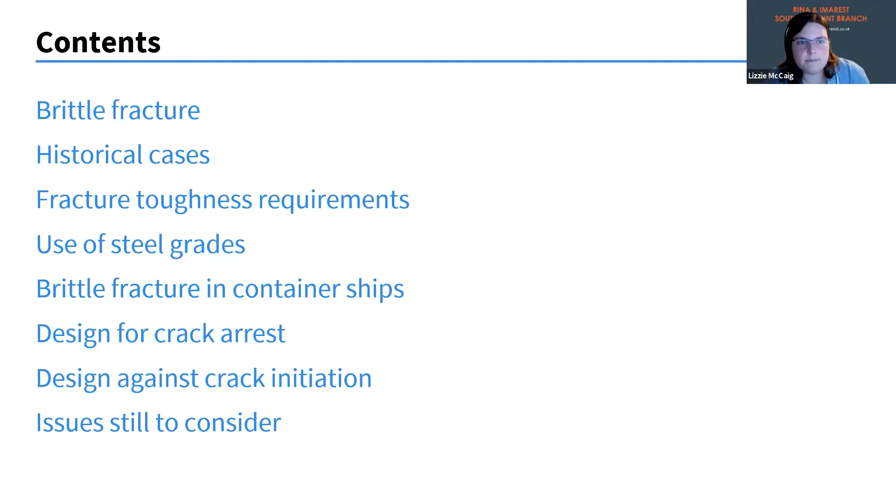So what is brittle fracture? Quite simply, it's the sudden, very rapid cracking of a material under stress, where you see very little plastic deformation. In a ductile example, the material is a bit like chewing gum - you pull it and it stretches and then eventually fails. With brittle fracture, it just snaps, a bit more like a hard caramel type thing.

The cracks themselves are usually initiated at a stress concentration, such as a pre-existing material defect, or a defect which might develop in service, such as from fatigue. The cracks will continue to grow and increase in magnitude once initiated, running perpendicular to the applied stress. In ductile failure, the material starts to deform plastically once yield is reached, and continues to deform until you hit the UTS. But in brittle fracture, there's no ductile behavior before failure - the fracture is very clean and sharp, and you don't have much warning that it's going to happen.

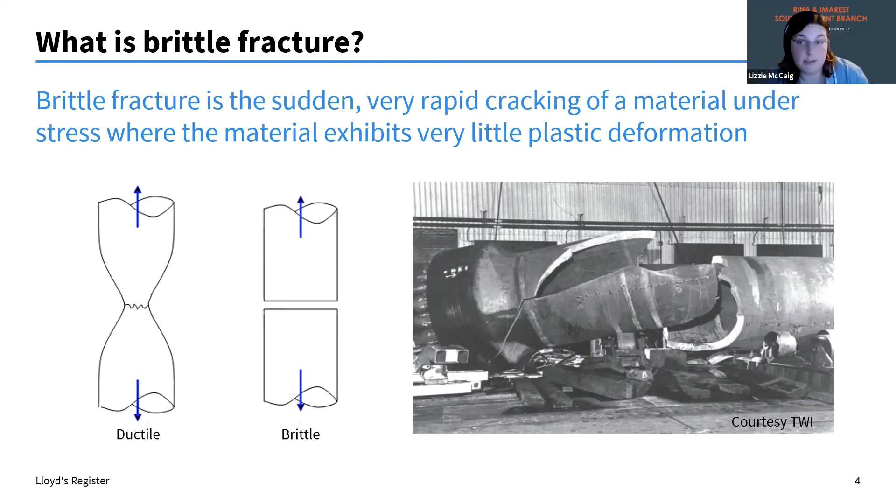Factors leading to brittle fracture can include high yield strength steels, low temperatures which can cause a ductile to brittle transition, overloading with high loading rates and high stresses, stress raisers resulting from flaws or cracks, and low fracture toughness in the material itself. Even coarse crystal grains in the structure can increase the possibility of brittle fracture occurring. As I said, brittle fracture failure is instantaneous, and it can have some catastrophic consequences.

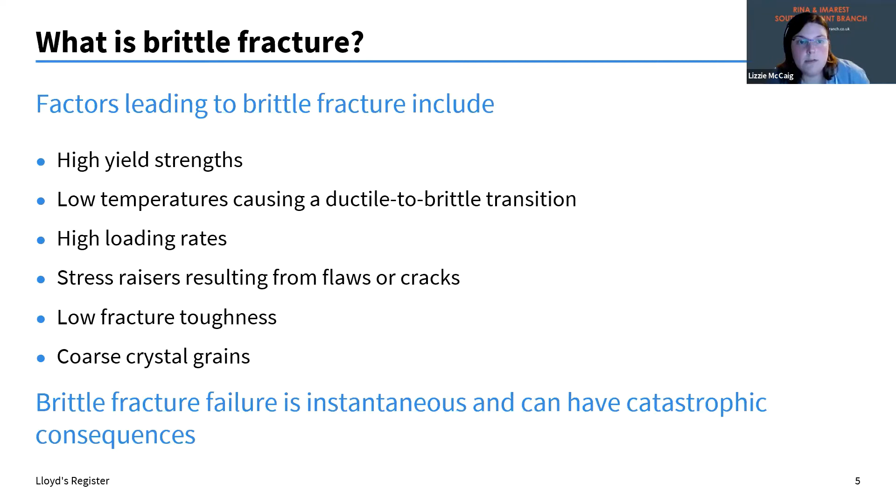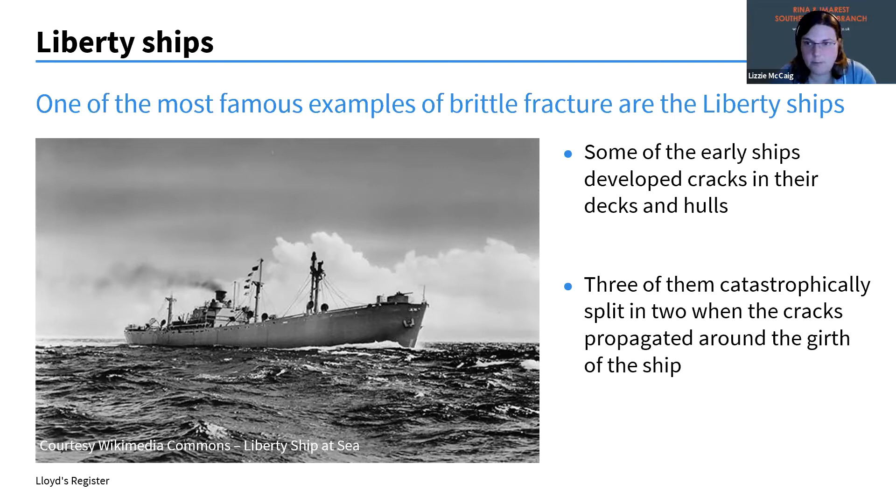So, historical cases. I think we've all heard of the Liberty ships - one of the most famous examples of brittle fracture. These ships were thrown together in World War II over in America, in a great hurry. They are also some of the first ships to be welded, which becomes quite important later. Some of the early ones developed cracks in the decks and hulls. Three of them catastrophically split in two, where the crack went all the way around the girth of the ship.

This is the Schenectady, and she broke in two whilst moored alongside for outfitting. That was quite an extreme example, and you can just see it's snapped in two.

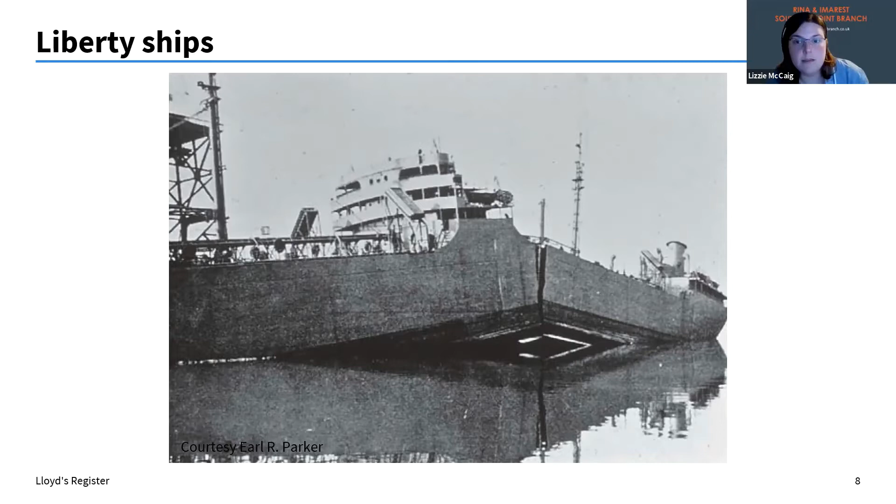So they needed to try and figure out what happened. The Ministry of War Transport, which was the department in Britain in charge of ships at the time, did some testing on an actual ship. It was a woman called Constance Tipper at Cambridge University who was running this whole thing.

Things they found were that because the ships were sailing in the North Atlantic in winter, they were exposed to temperatures that could fall below the critical point where the steel changed from being ductile to becoming brittle. That allowed cracks to start easily. Because they were using welded construction, that allowed the cracks to propagate from plate to plate, whereas in a riveted plate, you get to the edge of the plate and there's nowhere for the crack to go.

They get arrested when they hit that edge of the plate. Also, because of the quite poor design of the hatch corners, they had square hatch corners, and they also had weld seams located close to the hatch corners. That meant you had stress concentrations at that hatch corner that then went into the weld, and then it went all the way down the weld, and all the way around the ship.

Combine that with the fact that because it was a war, the ships were often overloaded, and again they were sailing in winter, so they were subjected to storms. All these things combined together didn't make for very good design against brittle fracture. Some of the things they did to address this were changing the hatch design and reinforcing the ships, which did reduce the number of fractures observed.

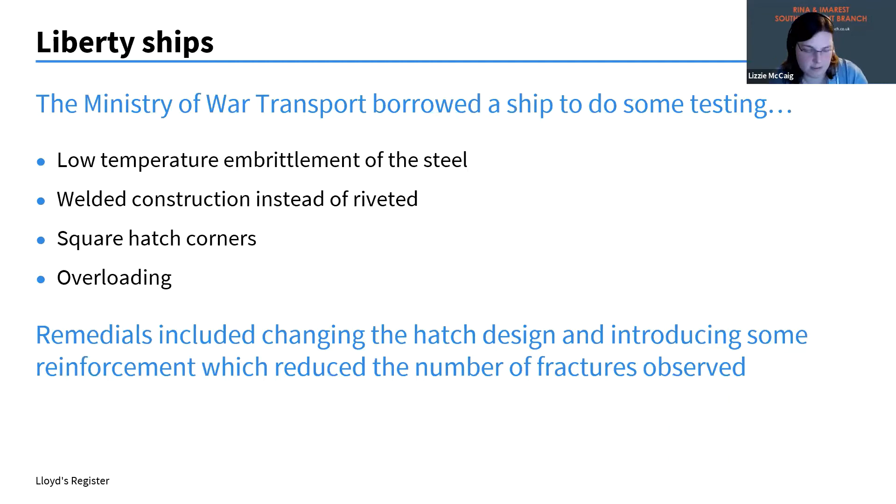So moving on, this ship is the MV Kurdistan, built by Swan Hunter in 1973. She was built to an ice class, at the time called Ice Class 1, which I think was not the highest level ice class at the time by that class society. She was longitudinally framed, but the sides were transversely framed, had 6 cargo tanks, and was built almost entirely of grade A steel.

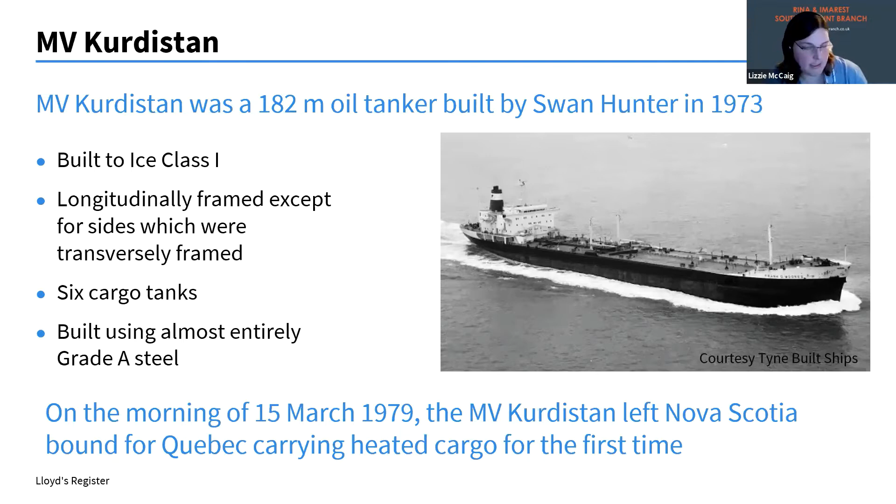For the ship, the weather conditions were quite poor. The ship was rolling quite heavily, and she was traveling through ice, which may have caused some damage. As she cleared the ice field, the crew heard a bit of a thud, a bit of a shock, and oil started to leak from a vertical crack in the sides of the number 3 wing tanks.

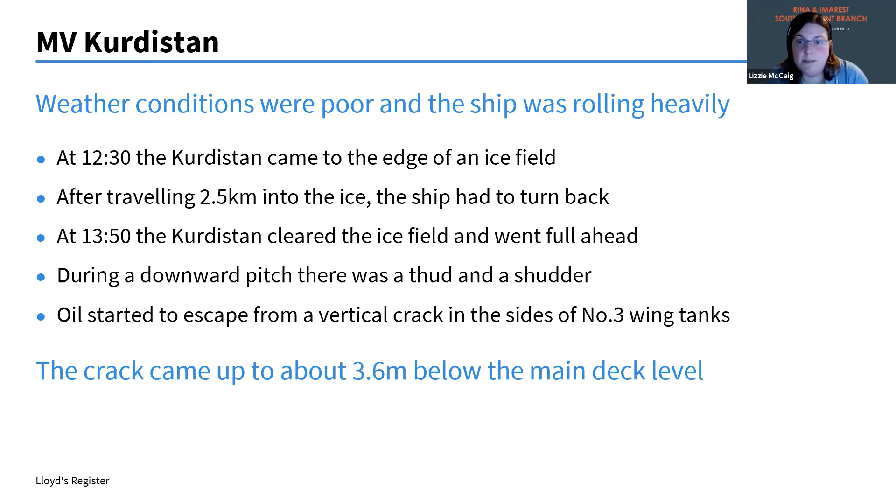These cracks came up to about 3.6 meters below the main deck level, so they're quite big cracks. The crew took remedial actions and the ship continued on. They transferred oil from number 3 wing tanks to number 4 tanks, but then they felt a second shudder and halted that oil transfer. The weather conditions had improved by this point, but by 9:30 the ship had broken in 2.

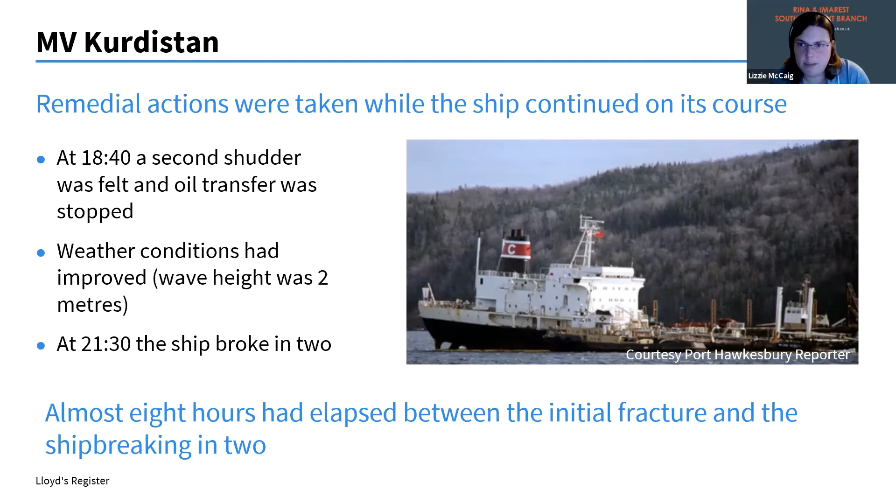Basically, between the first fracture and the ship breaking in two, it was about 8 hours. So it was quite quick.

Transport Canada investigated this and found that it was due to a brittle fracture. There was a defective butt weld in the port bilge keel. The bulb plate was misaligned, the crack arrest hole was missing, and thermal stress calculations indicated there was a tensile stress in the shell and the bilge keel resulting from the carriage of the warm cargo in a cold sea. That combined with impact stresses on the bow meant you had an overload of the bilge keel and it fractured.

So this is like the combination of poor weld metal toughness and high stresses in the presence of a defect. They didn't quite establish the sequence of the failure, but they did identify that it was due to this low temperature, high temperature transition, and the weld defects.

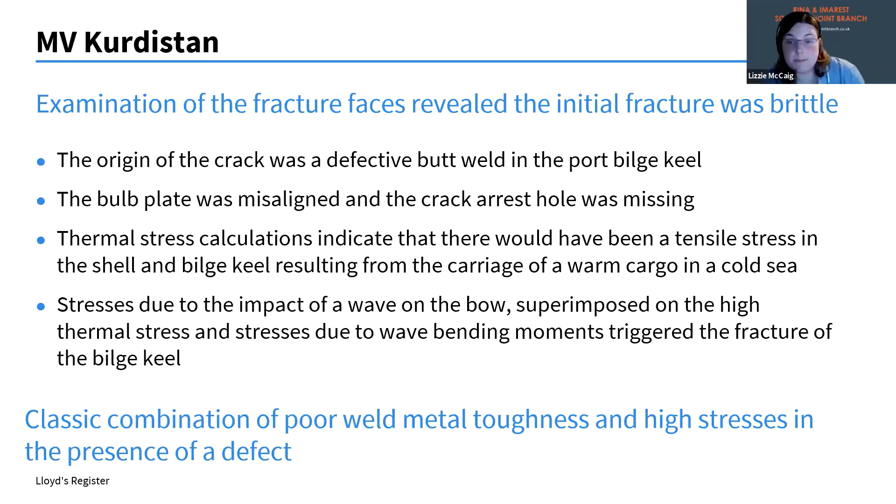So the next one, this is also quite a famous one. This is MV Lake Carling. She was a handy-sized bulk carrier built in 1992. Again, this is in North America, crossing the Gulf of St. Lawrence. She was ice class, strengthened for heavy cargoes.

She had grade A side shell, but the shear strake and strength deck were grade E. All the steel grades did comply with the class rules at the time, so from that perspective, she complied with the rules.

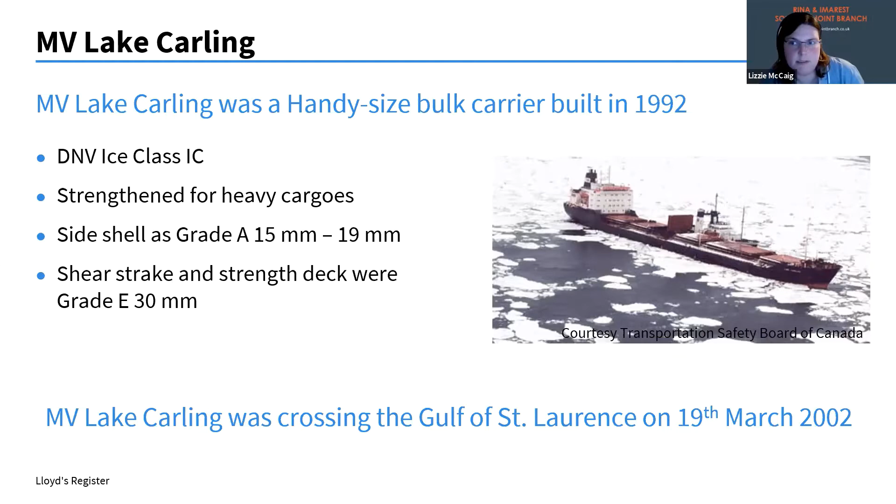There was a minor crack in the hull and it turned into a 6-meter hull fracture. The crack initiated at the base of the web frame at frame 91. On the port side, they found similar cracks at other locations, and calculations showed that the original crack was as short as 10 centimeters.

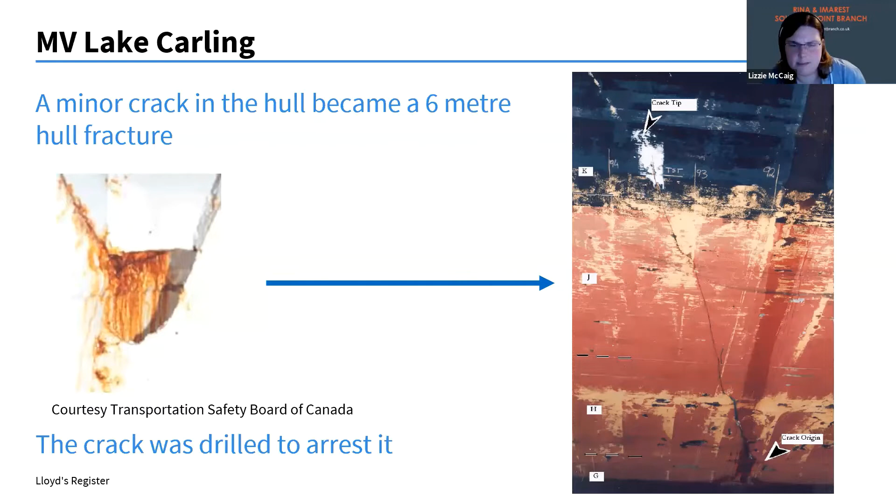So the question was why did it then lead to this massive 6-meter long hull fracture that they had to arrest by drilling a hole through it?

So they looked at it. The vessel was properly loaded, the seas were calm, temperature only -6 degrees - it wasn't that cold. But when they looked at the material itself, they found that the fracture toughness and grain size of the steel were below what you'd expect - there wasn't an official industry standard at the time, but it was below the average values you'd see for grade A steel at that time.

And this is a quote from the accident report. It said the steel performed below expectations and did not provide a reasonable damage tolerance in all its operational conditions. So this is a case where the material itself was just poor quality, and that led to the brittle fracture.

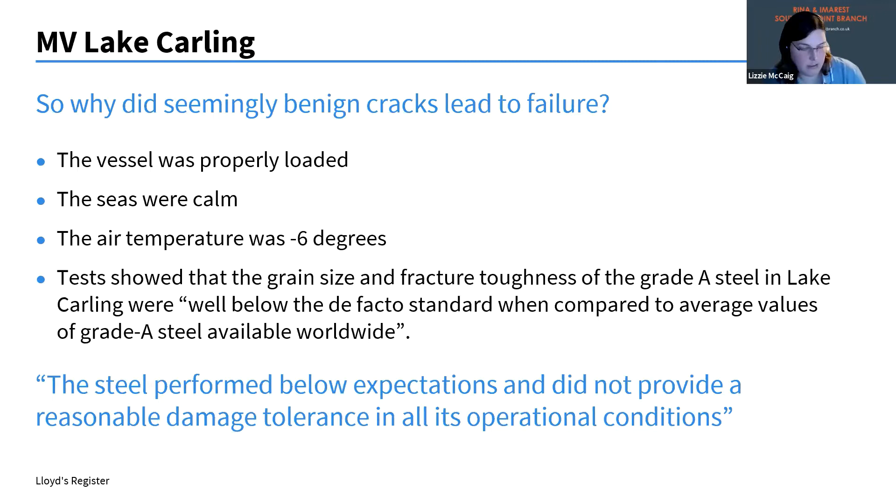So the next case, this is a bulk carrier built in 1972. The hull was grade A, the deck and shear strake grade D. She was strengthened for heavy cargoes. She was going through severe weather conditions and broke in two.

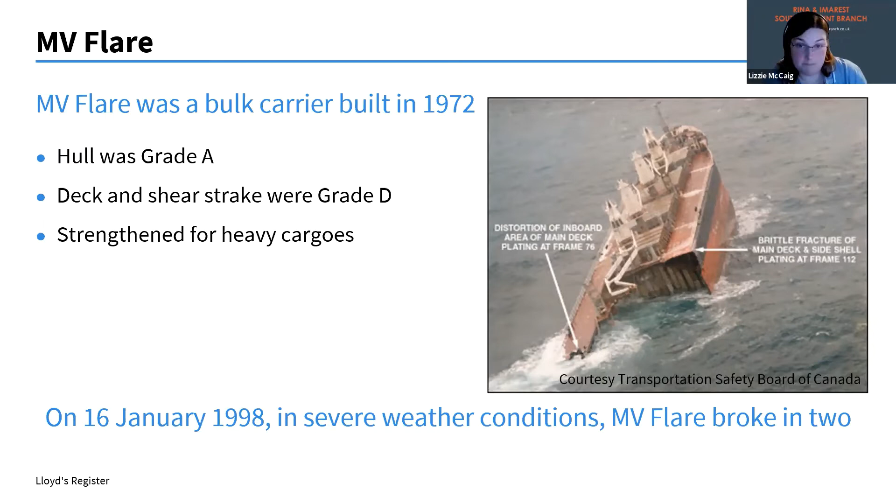This is a lovely picture extracted from the accident investigation report, where you can definitely see it broken in two. So what happened here was that the deck transverse at frame 76, inside the number 5 port upper wing ballast tank, had been damaged. The face flat boundary stiffening was detached, extensively buckled. They found the deck longitudinals completely detached from the underside of the main deck plating.

Crucially, the fractures at the end of these longitudinals showed no plastic deformation and were at 90 degrees to the normal deck plating surface. I think you can just about see the buckling, and you can just about see the brittle fracture, but there's more pictures to come.

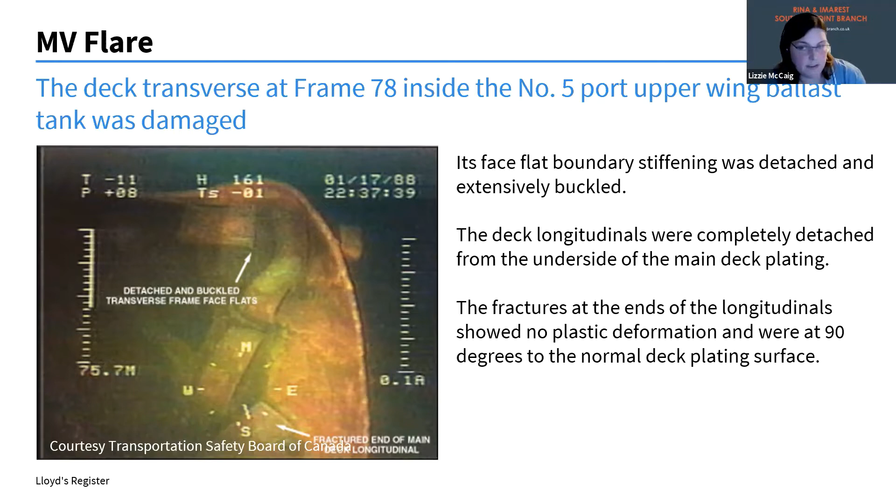A close-up examination showed that there were several small clamshell-shaped fissures, which is a typical characteristic of fatigue fissure damage. They were also corroded, which indicated these had been there for quite some time before the accident happened. The initiation and rapid propagation of the brittle fracture across the main deck at this location is consistent with the existence of such discontinuities.

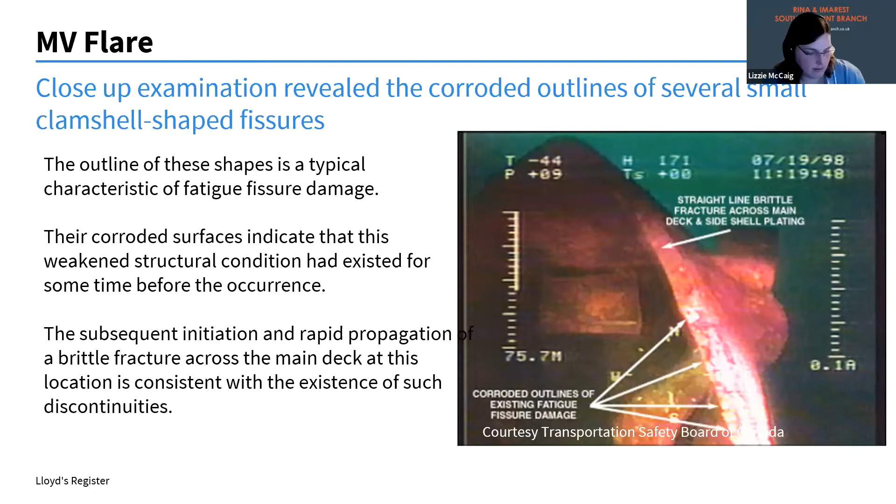Then you can see here more of these clamshell shaped markings, and the Transportation Safety Board of Canada found that their location in the principal line of structural failure indicated that they'd contributed to the concentration of localized stress levels in excess of those which the bottom shell plating could physically withstand. That said, she'd been sailing around for quite some time with these fissures, so why did she fail?

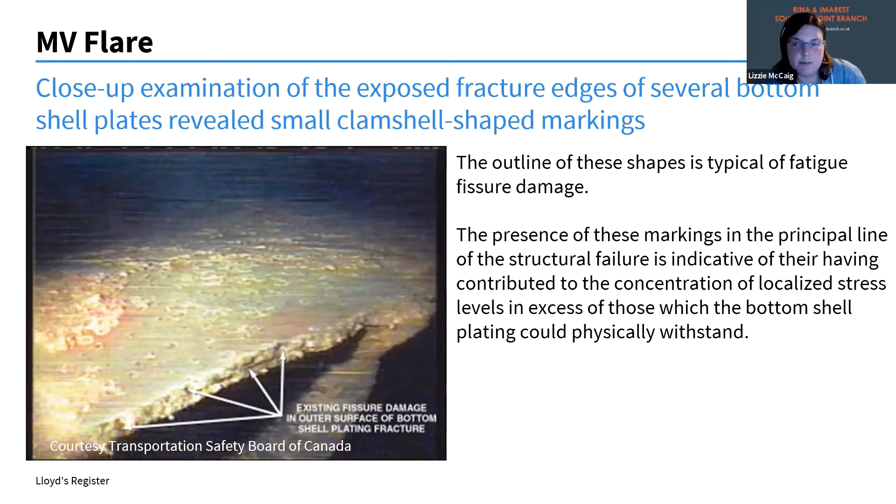Why did the ship break into two on this particular day? The vessel routinely sailed with a light draft forward. The minimum draft forward for the vessel was supposed to be 4.6 meters. The actual draft forward was 3.07 meters when the ship left Rotterdam. She was crossing the North Atlantic in winter, but the number 4 ballast hold wasn't filled with ballast as it should have been. This would have left the vessel vulnerable to pounding and slamming.

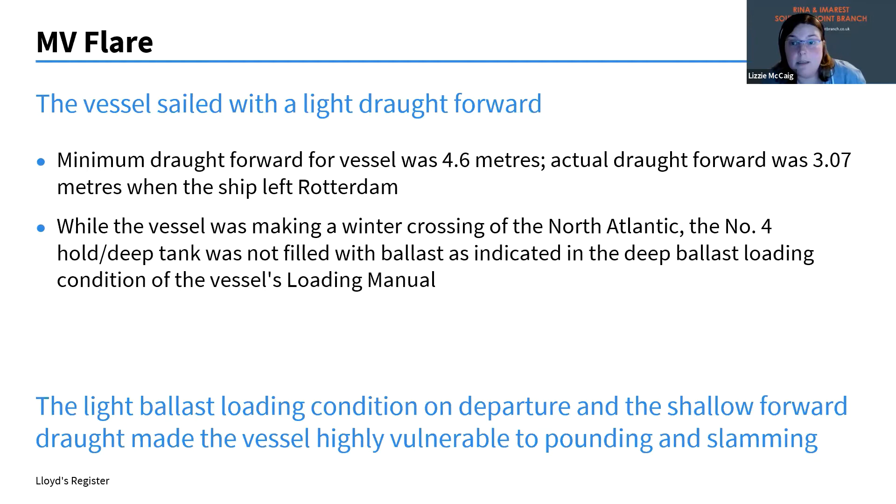One of the typical solutions if a vessel is slamming is to increase the draft forward through the use of ballast. In addition, the ballast tanks themselves had been damaged previously. There had been quite a lot of structural repairs required to the ship that weren't carried out before she left Rotterdam. Fractures in the boundaries of the upper wing ballast tanks had been discovered, and they were being repaired during the voyage, but the repairs hadn't been completed by the time of the accident.

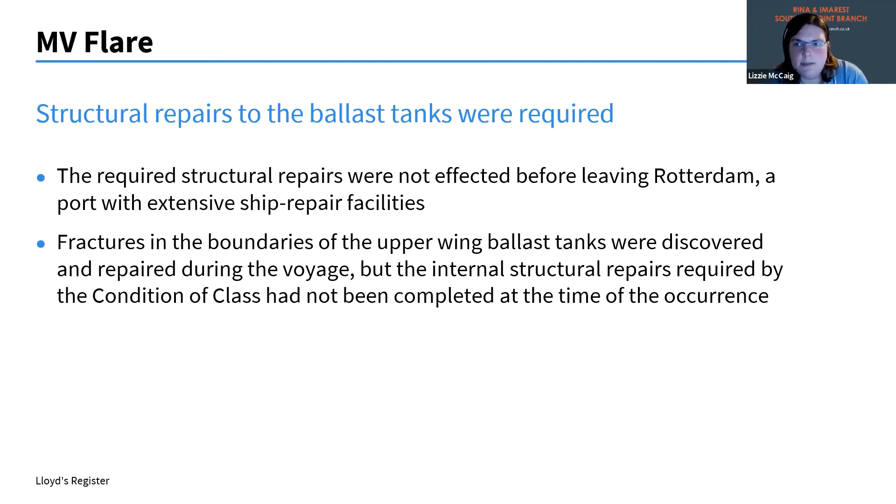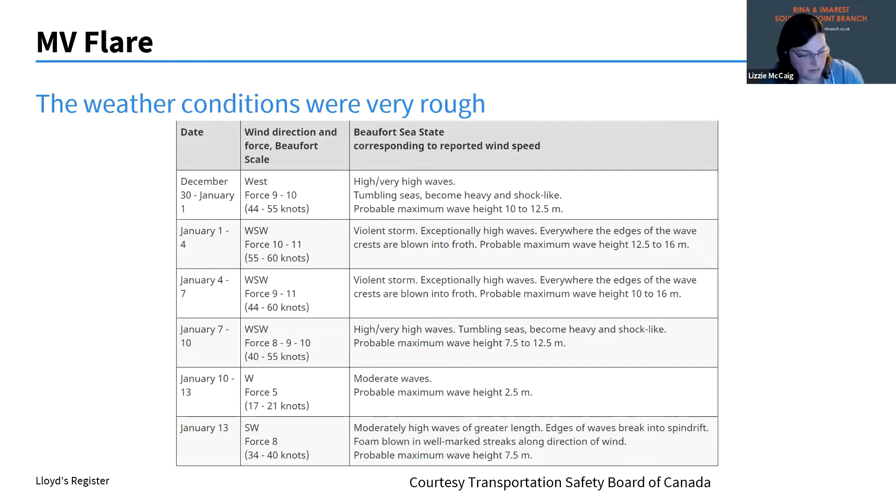You then combine that with the fact that the weather conditions were quite rough. They had very high waves and a violent storm, exceptionally high waves, and another day, January 4th, 1998, another violent storm with more high waves. This day was okay, moderate waves, but you can see the weather conditions were pretty rough. So at midnight on the 16th of January, the ship encountered large and steep irregular waves, which reportedly caused slamming at the forward end, and there was a loud bang and severe hull whipping and vibration.

And then at 4:30, there was loss of longitudinal structural integrity initiated by the rapid brittle fractures that had appeared in way of the existing damage near midships. There was then bottom structural failure, which resulted from suddenly imposed compressive loading and localized stress concentrations, which then caused the hull to break in two.

So this was a case of the ship not being properly operated in the first place, and they were playing a bit fast and loose with their repairs as well. That led to a case of overload essentially on the ship, combined with some structural damage that already existed. So you can see from all those various historical cases the different means by which you could end up with a brittle fracture in a ship, be it from stress raisers, from defects, from overload, from low air temperatures, poor quality of material. All of these different aspects need to be thought about in order to reduce the risk of brittle fracture.

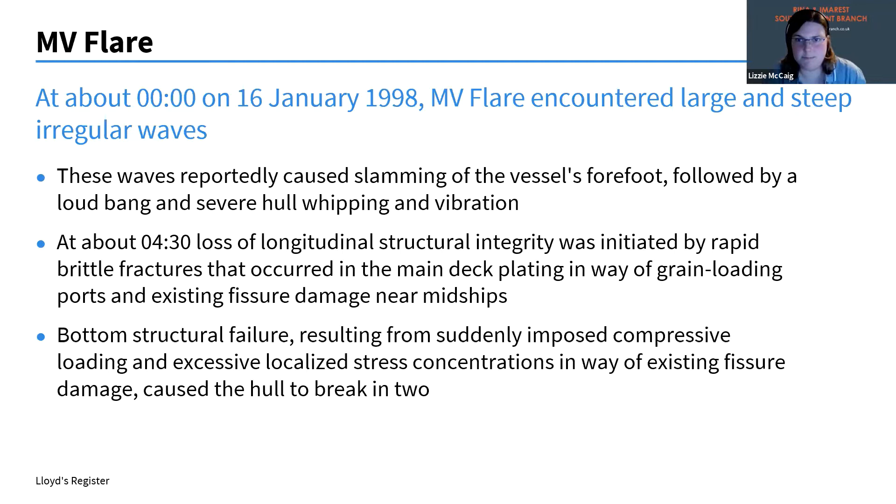So if we move on to fracture toughness requirements, this is about the material itself. We'll talk about improving the quality of the material first.

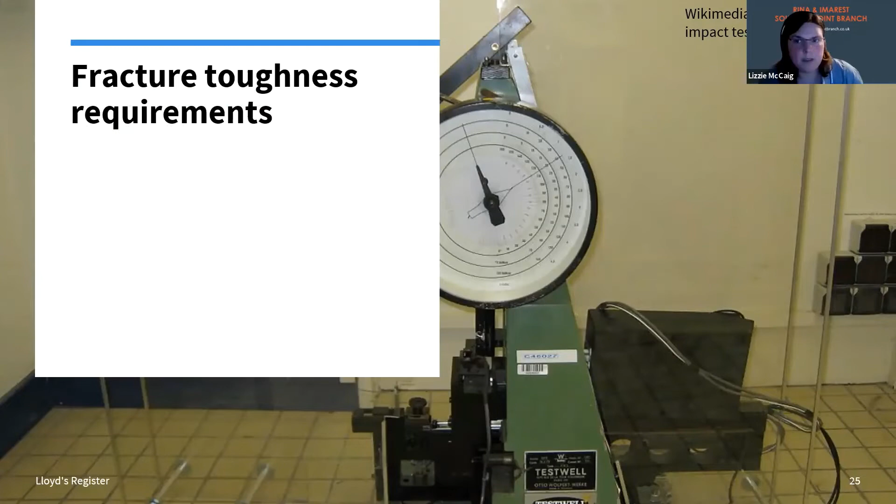Obviously we're talking here about the Charpy V-notch impact test. This was established in the 1950s, and in 1954 DNV were the first class society to introduce the Charpy test. By 1959 IACS, covering all the main class societies, introduced Charpy test requirements, but this was only for grades D and E. And by the 1970s the standards had risen, but we were still getting brittle fractures, as evidenced by MV Lake Carling.

By the 2000s, there was a minimum standard for grade B, but there still wasn't one for grade A. Actually LR had a standard for grade A, but the standard wouldn't have been sufficient to prevent MV Lake Carling. That's quite important to note. The main problem though is that it's quite difficult to get accurate and reliable correlations between Charpy energy and fracture toughness. So that's something else to bear in mind there.

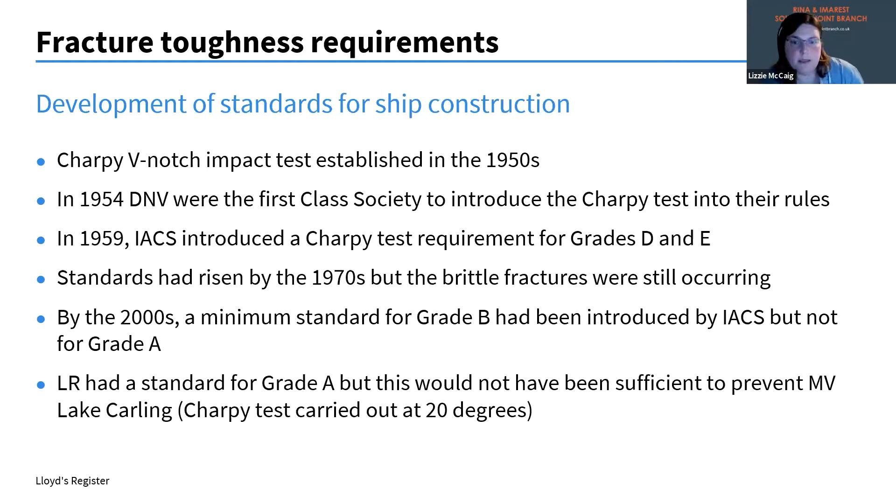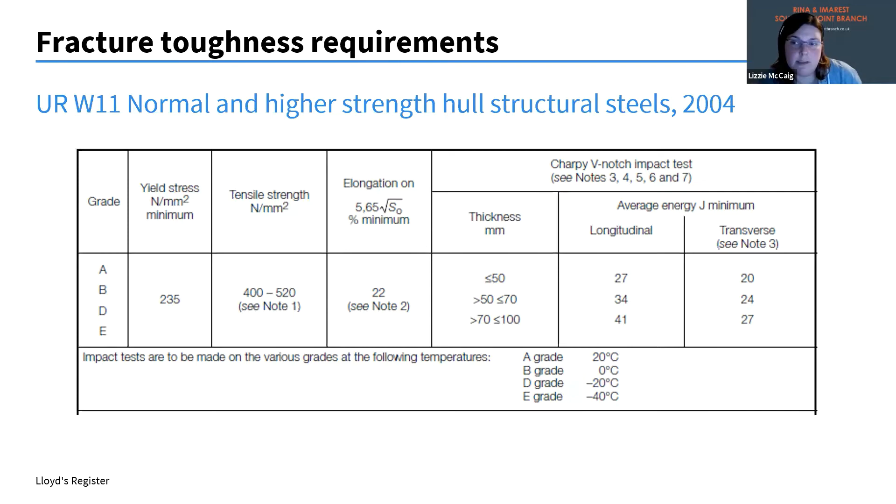But it's not enough to just specify what the material properties should be. We also have to look at how the steel grades are intended to be used. So IACS has another unified requirement, UR S6, which was introduced in 1979. What they do is divide different structures up into stress classes of 1, 2, and 3, based on the criticality of the structure.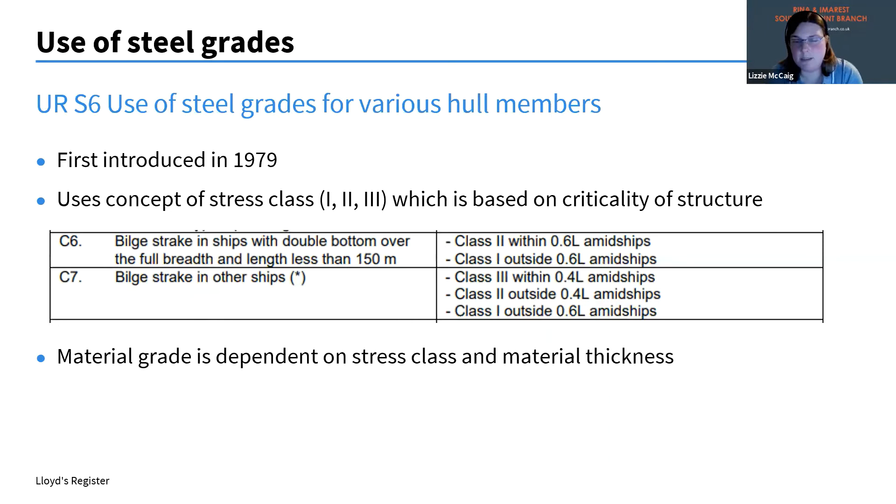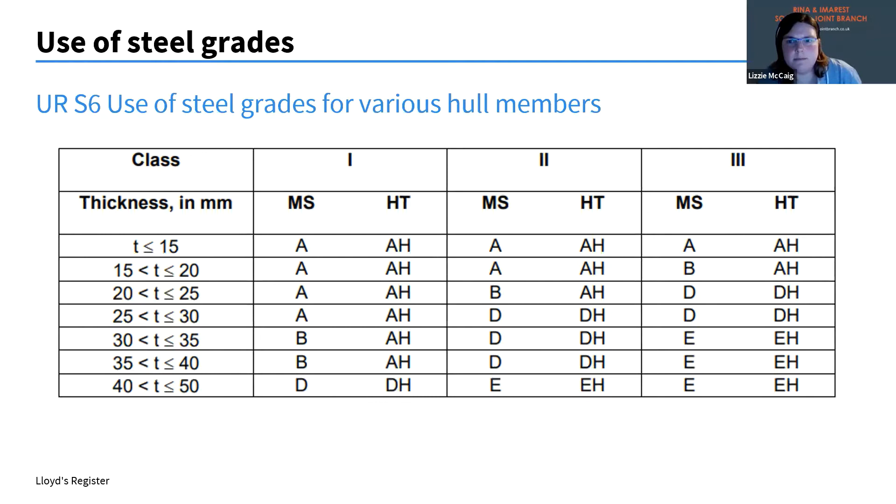And this material grade that you use in a particular location is dependent on the stress class and the material thickness. So you end up with this: looking here, for example, if you've just got non-critical structure that's less than 15 mil thick, then using grade A is perfectly acceptable. However, if you've got really critical structure and it's 50 mil thick, we're moving to grade E and grade EH. So these materials are getting tougher as they are more critical and thicker. We also have in UR S6 requirements for low air temperatures.

One of the leading causes of brittle fracture is if the steel's exposed to very low air temperature. IACS introduced this basic table after MV Lake Carling. It was imposed on them by Transport Canada that they had to sort this out. Here you can see that the lower the air temperature gets and the thicker the steel gets, the tougher the material needs to be, the higher the grade. You go from grade E here, and you actually can't even have minus 55 degrees C with 35 mil thick plate. You're just not allowed to do it. You have to go to grade FH. You can't even have just standard steels. So that's basically how all the IACS class members are controlling the use of steel grades.

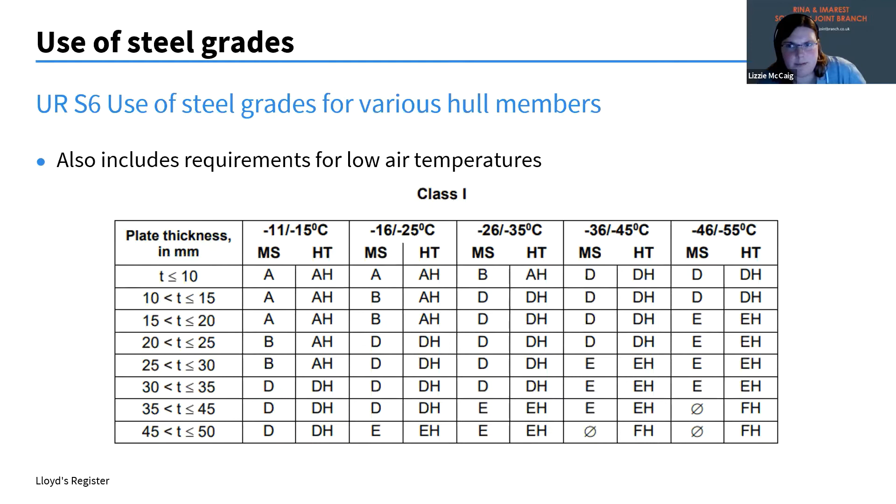However, this doesn't cover all eventualities. We then have to look at more non-standard uses. So that leads us on to brittle fracture in container ships.

As you can see from this, this shows the increase in size of container ships over the years. I think I created this in 2018, which is why it only goes up to 2018, but you can see there's been a rapid increase in the size of container ships.

What this has meant is that the required plate thickness for the upper hull girder has increased dramatically because the stresses have increased a lot. And in order to reduce that plate thickness, the use of high tensile steels has increased.

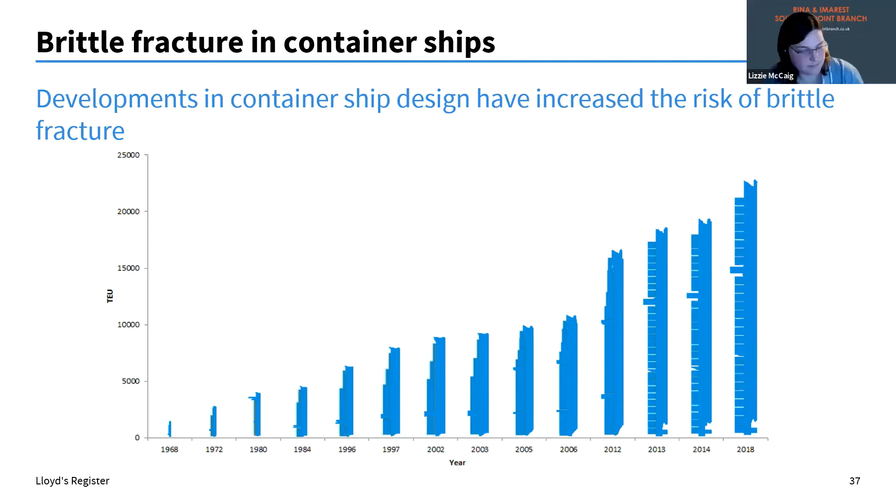You can see here this plot showing hatch coaming side plate thickness, and these are the different steels. As we get bigger and bigger ships, down here we've just got YP32, so that's high tensile steel, but it's not that high tensile. We move on to YP36, but then by the time we get up to 20,000 TEU, they're using YP47, which has a yield stress of 460 newtons per millimetre squared. So the trend has been, as the ships got bigger, to use higher and higher tensile steels.

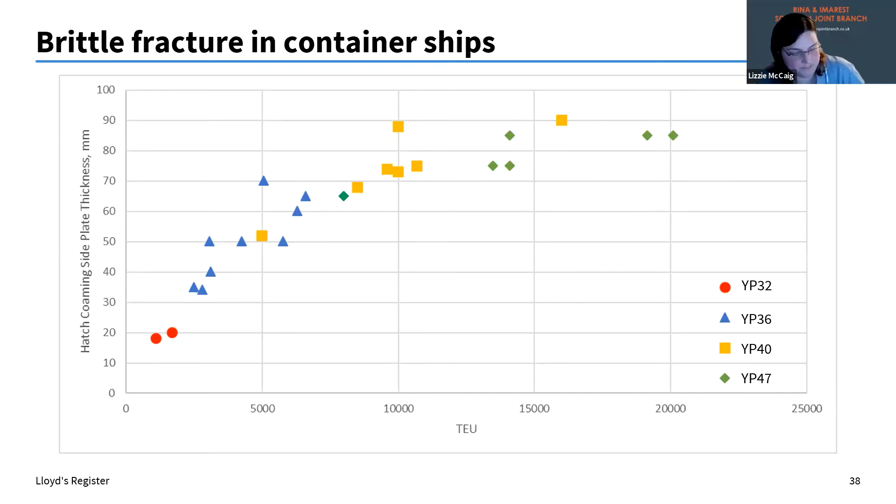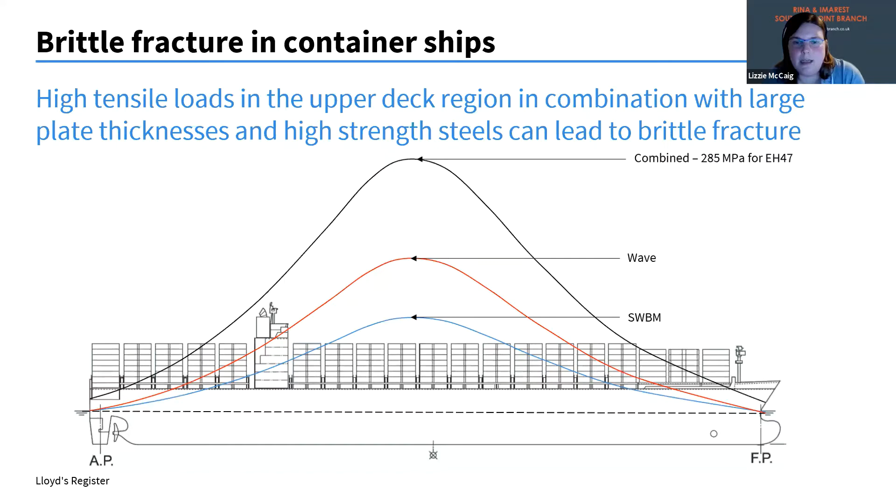The problem, though, is that these container ships also have very high tensile loads in the upper deck region. So you're combining very, very high loads with very high strength steels. As a result, this can lead to brittle fracture.

This is just showing that because container ships are normally hogging, that means the weld seams of the upper hull girder are normally being pulled apart rather than compressed. For those of you familiar with fracture mechanics, when you compress a crack, you slow the rate of growth, whereas if you start pulling it apart, you increase the rate of growth. So this is another reason why this is a particular problem for container ships.

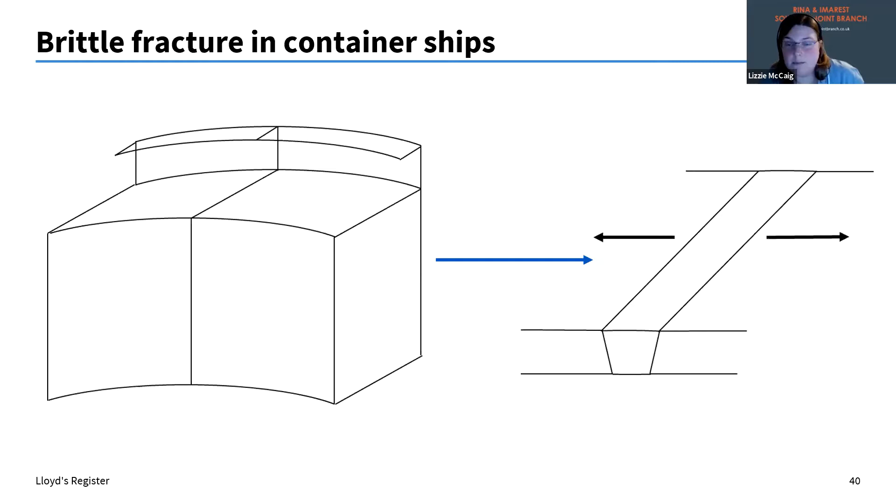The other problem is that as a material gets thicker, it is more likely to experience brittle fracture than ductile fracture. Also, as the strength of the steel increases, you're more likely to see brittle fracture versus ductile fracture. So if you have both an increase in the yield strength of the steel and an increase in the thickness of the steel, you're increasing even more the possibility that you could experience brittle fracture.

That, combined with the presence of welding imperfections which could lead to fatigue damage because you've also got high cyclic loads, does mean this is a particular issue for container ships.

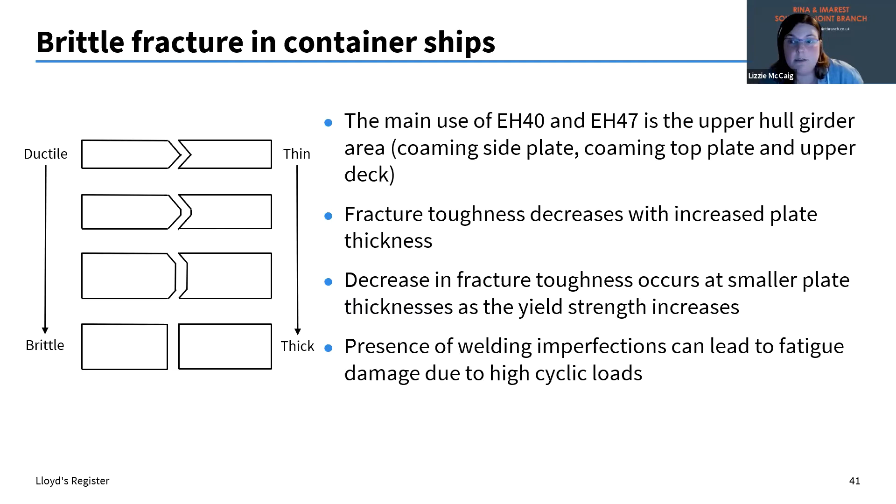So when we think about container ships, IACS have introduced a unified requirement, UR S33, that looks at this problem. In that UR, we consider two cases: one where you might have a brittle crack running along the butt joint of the block or subblocks, and another where a brittle crack initiates in that joint but deviates away from the weld into the plate, or where, with other weld attachments like longitudinal stiffeners, a brittle crack could initiate from one of those welds and propagate into the plate.

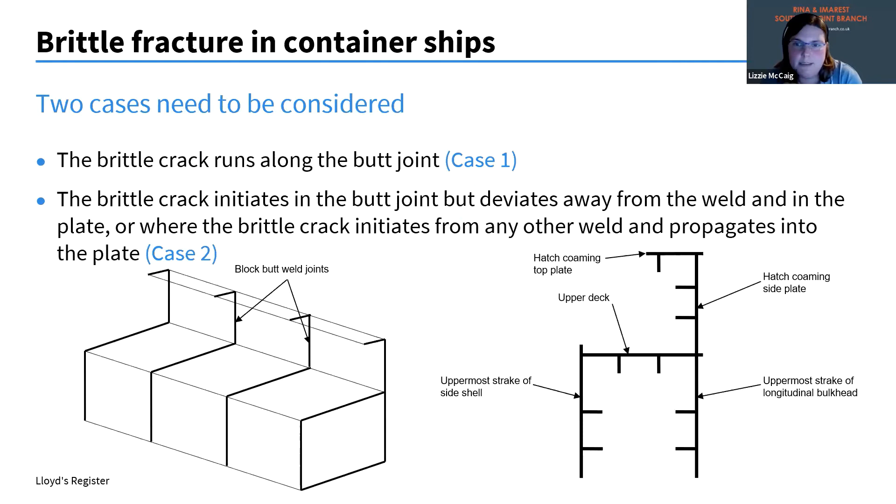IACS basically suggests measures you can use to try and reduce the risk of brittle fracture. The first approach you can take is to design for crack arrest. So you assume that a crack will initiate and propagate, but something about the design of your ship is going to prevent that crack from leading to the loss of the ship. Its propagation, its growth, will be halted by something — and that something could be various different mechanical measures.

So you can do something called block shift, where instead of having the weld for your hatch coaming in line with the weld of your upper deck, which is then in line with your side shell, you can offset these. So if you have a weld that's initiated in your hatch coaming butt weld, it will then get halted by the plate instead of going into the weld seam of the upper deck.

You can also drill crack arrest holes, and again these will halt a crack in the weld. You could also use crack arrest insert plates, which will do the same thing. Then where you've got the crack going into the parent material itself, that's where you use crack arrest steel. You don't want your crack initiating in your weld and then deviating into the plate and going all the way through, causing brittle fracture. So you use crack arrest steel.

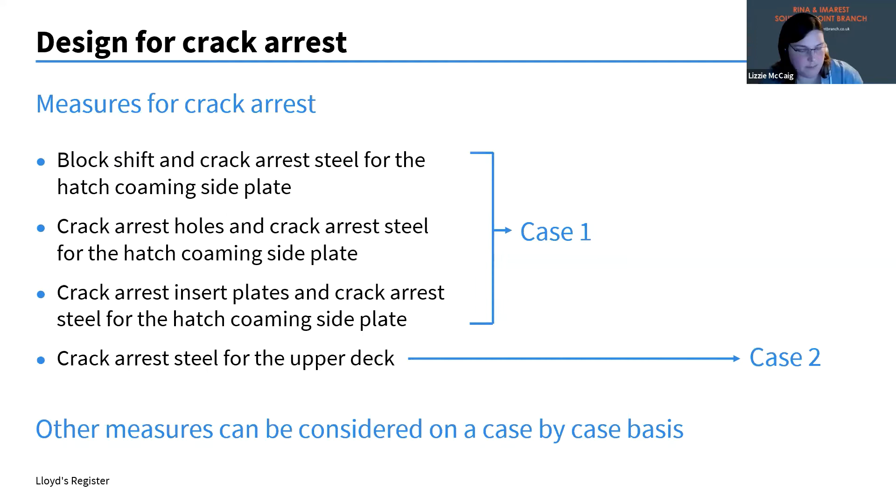These measures have been extensively tested, mostly in Japan, and that's why IACS has included them as example measures in their unified requirement. Although it's important to note these are only possible measures—you can do other things, but it's more complicated to demonstrate they work.

Now with crack arrest steel, the way it generally works is you arrest the propagation of cracks using the plate itself, using the boundary of the crystal grain to act as a barrier to crack development. If you remember, I said before that one of the problems for the Liberty ships was they had quite coarse crystal grains in their plate. If you have coarse crystal grains, it means fewer crystal grains in the plate, which means fewer boundaries that could slow the crack down and halt it.

Whereas if you have fine crystal grains, you've got a lot more boundaries, and the path the crack takes has to go through there, and there, and there, and this can arrest the crack. You can also use the orientation of the grains to force the cracks to zigzag instead of developing linearly, which again can slow the crack down and ultimately halt it.

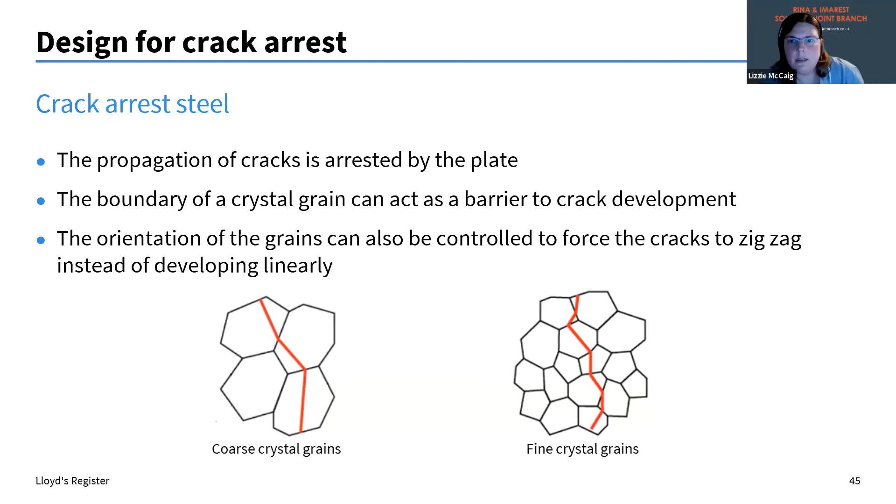Now the crack arrest steel's measure of arrestability is the KCA, or the arrest toughness. IACS have requirements about the toughness of the steel, with two levels: BCA1 steel, where the KCA value is 6,000, and BCA2, where the value is 8,000—8,000 being tougher than 6,000. In UR S33, IACS requires that for the hatch coaming side plate, if it's EH47, you've got to use BCA2. This is an even tougher requirement than you would have for, say, the upper deck, which would be EH40.

Now the issue with crack arrest steel is it's quite expensive. The reason is you have to do a lot of testing using full-scale model tests to confirm the crack arrest properties, and that just loads cost onto the material.

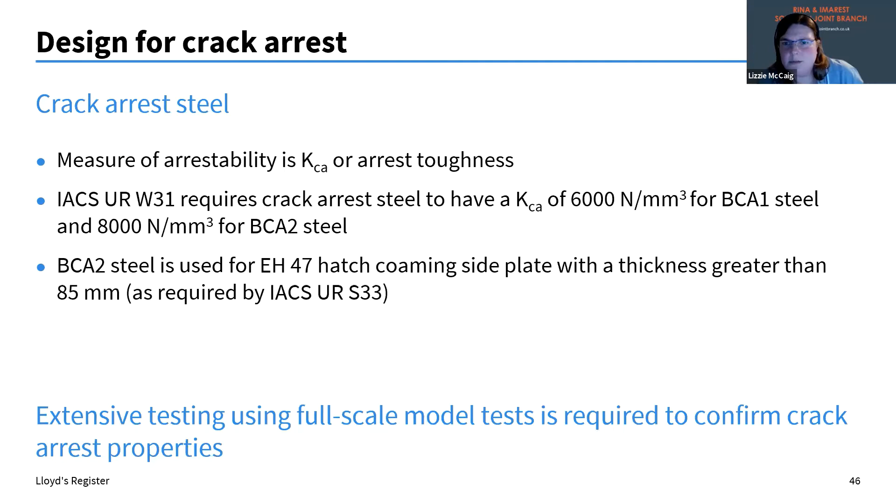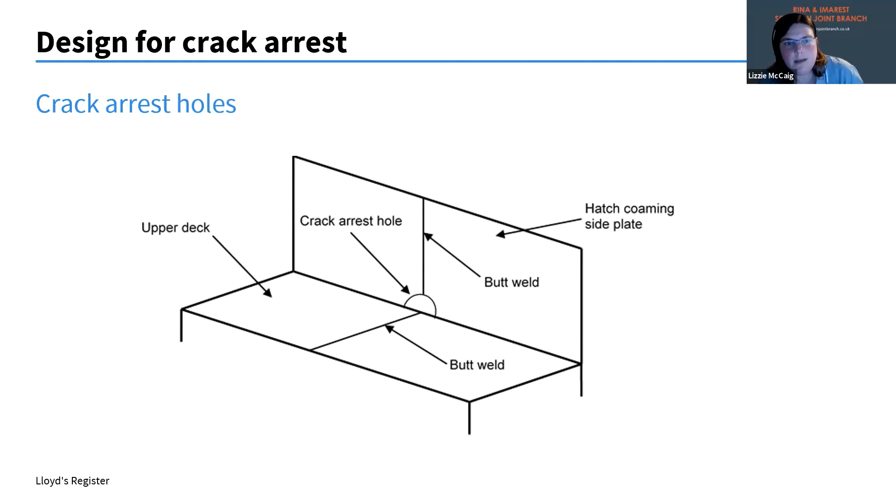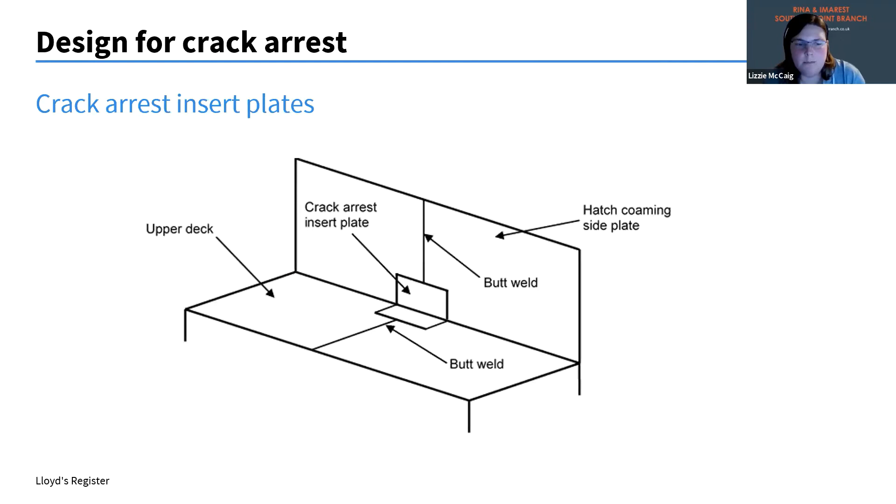The other approach you can take is a design against crack initiation. The idea here is that you improve the quality of the welding to prevent the initiation of a crack from a defect in the first place. So IACS talks about having 100% ultrasonic testing, but also talks about using enhanced NDE methods such as time of flight diffraction or phased array ultrasonic testing.

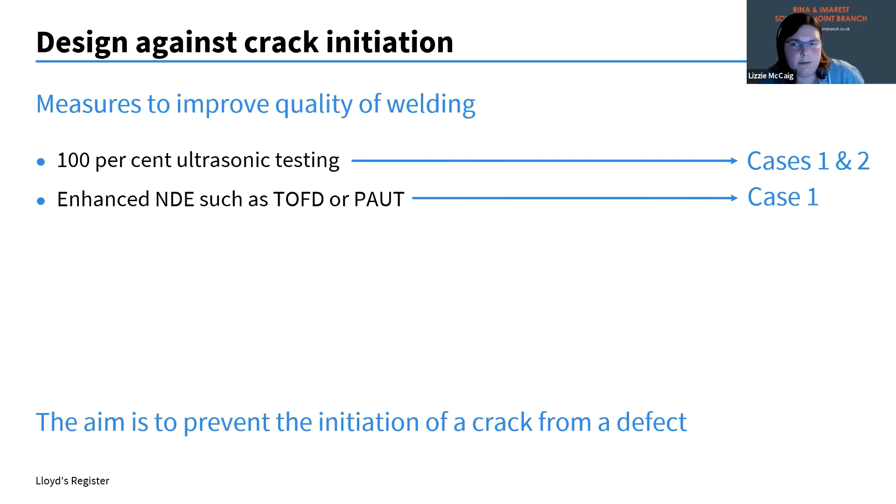Now IACS is allowing enhanced NDE as an alternative to those mechanical measures like block shift, crack arrest holes, and such like. If you're going to use enhanced NDE, you need to know what your critical defect criteria should be, and in order to do that, you need to carry out an engineering critical assessment—this is the determination of the minimum detectable initial defect size.

Then you calculate the cyclic crack growth. You then determine the critical crack size, and compare the critical crack size with the size of your actual crack after a certain time period. Then you determine a suitable inspection strategy.

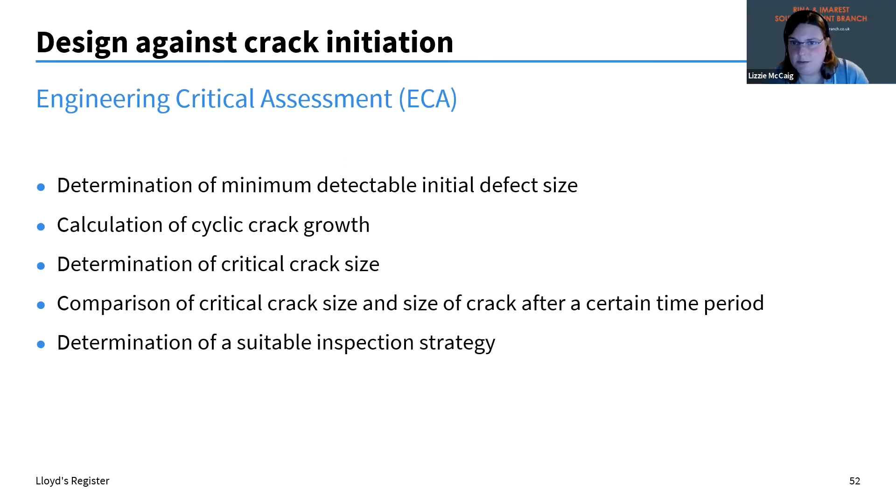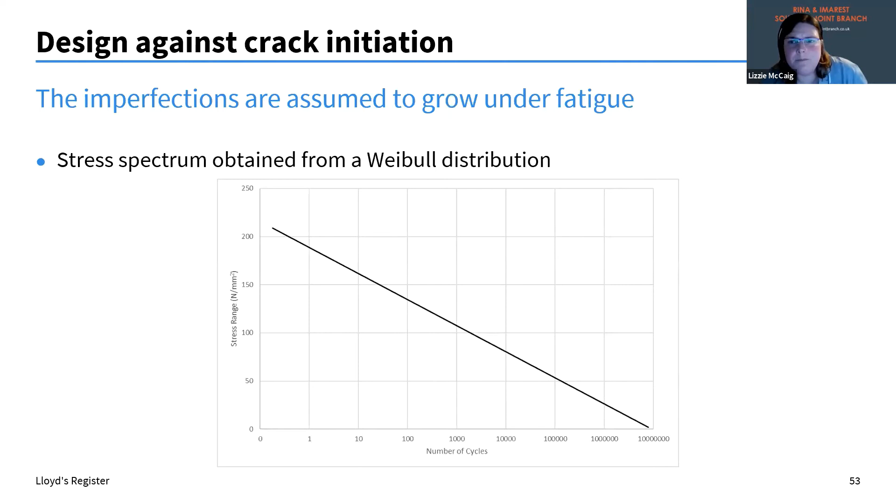So we assume imperfections will grow under fatigue. We use a stress spectrum obtained from a Weibull distribution, because you need to use the loads for the ship, and this is all predictive global loading—wave loads are stochastic after all. You then grow the imperfections under a fatigue scenario, and we assume a two-stage crack growth relationship, which is all based on a British standard called BS 7910.

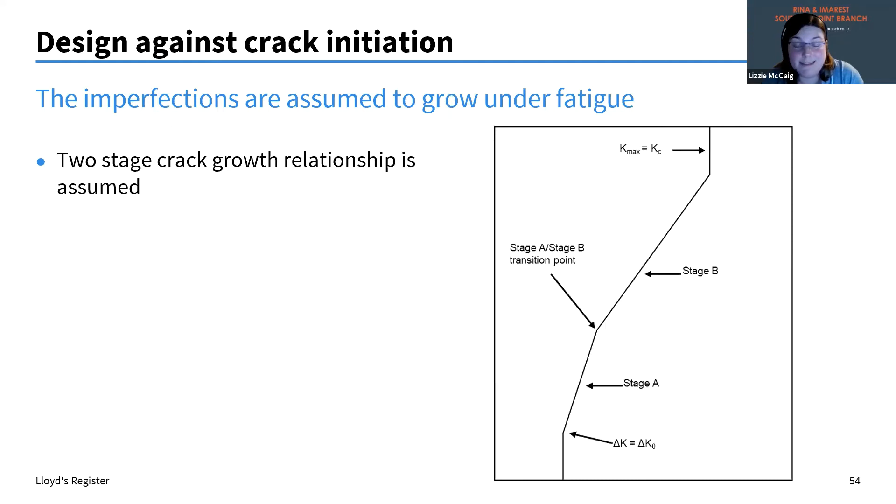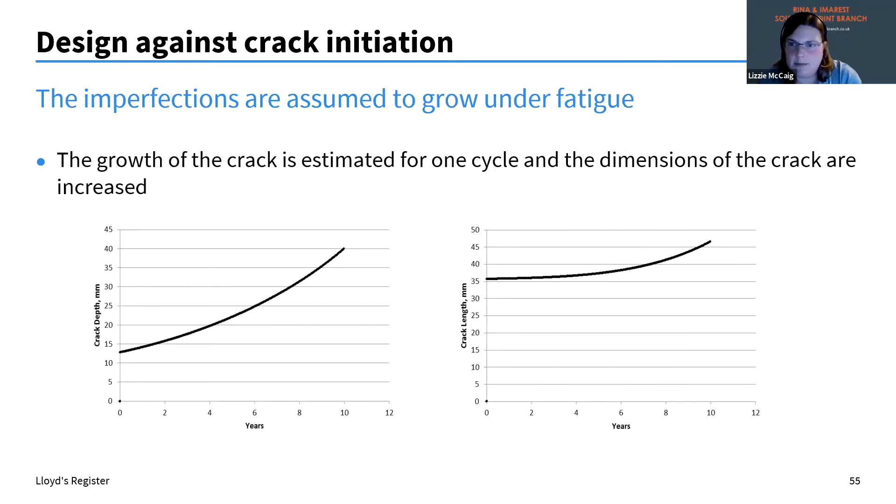So that you don't have to worry about this defect. But obviously you take those defects and do enhanced NDE to actually measure the size of the defects in the welds and make sure they're not above that critical defect size. There are other options. If you can't quite achieve the design life, you could potentially do in-service NDE and have to re-weld things potentially.

So those are the two kinds of approaches you can take to try to reduce the risk of brittle fracture. It's not something that can be completely reduced. It is still a probability game, unfortunately, at the end of the day. But you try to do as much as you can to minimize that risk.

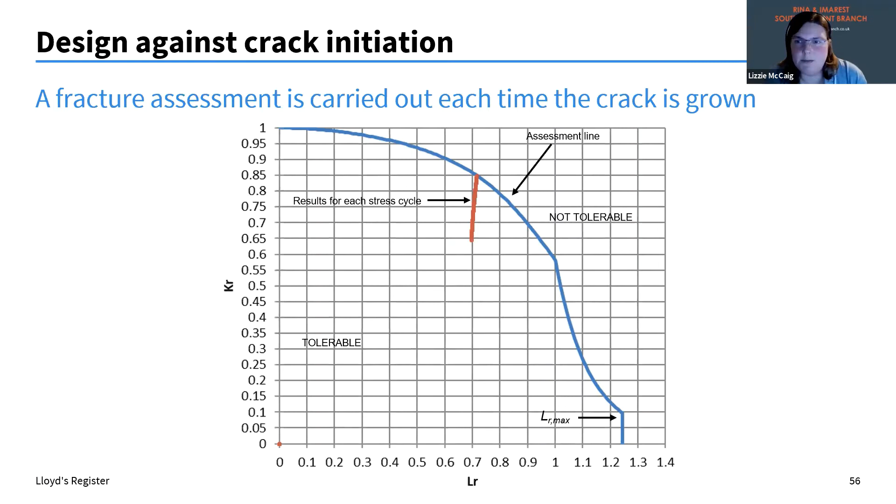But as ships get more and more optimized, you can predict that at some point someone's going to want to use EH47 for thinner plates. For example, if you had a passenger ship, which is very weight sensitive but also has high stress concentrations because of lots of openings, you could see EH47 being used around the corners of those openings.

And there was also, do we need that to be crack arrest? Is this something we need to be concerned about? At the moment, this isn't something that's been discussed much, and it's still very much something we'd have to look at on a case-by-case basis, but it's coming. This usage is going to get more pronounced, especially as the cost of the material comes down.

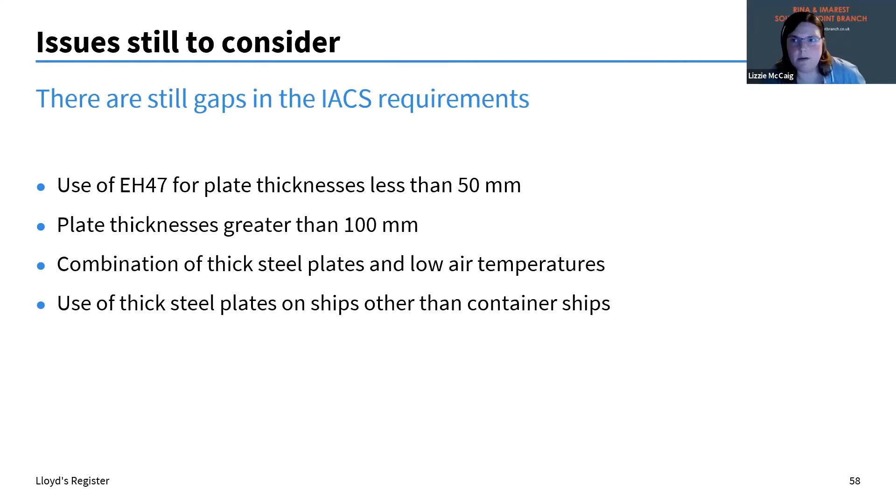And that brings me to the end of the slides.

I guess we can move on to if anybody's got any questions. At the moment, no one has asked anything in the chat. It would seem someone has got their hand up. Okay, so Richard, I will allow you to talk.

I can hear you, yes. Can you see me? Do you want to see me? I don't really need to see you, but if you want to be seen, then you can. Yeah, I'm not quite sure how to do that.

When I was training, the impact test used was the Izod impact test, which I think was a British test. The impact test generally used now is the Charpy test, which I believe is a French test. Is the Izod impact test still used, or has Charpy completely taken over now?

I'm not completely certain. Certainly IACS discusses Charpy tests. I'm just wondering if any of my materials colleagues from LR on this call might want to put their hand up and answer that question. I think the Charpy test is predominant, though obviously that's not quite the same as a fracture toughness test.